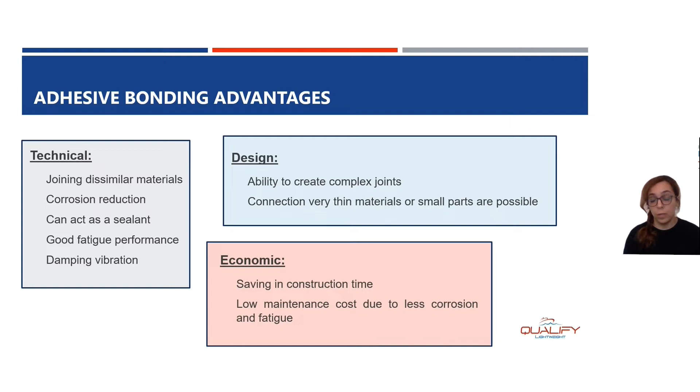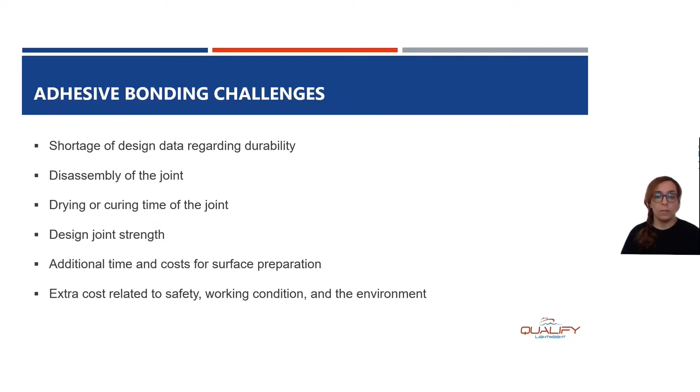There are also some challenges, and that's why Qualify project was started. A shortage of design data regarding durability, disassembly of the joint. These are some of the challenges. We need some curing time, some drying time for the joint. Well, knowing the design joint strength in advance can be sometimes challenging. Some additional time and costs are needed for the surface preparation, perhaps some extra costs related to safety, working condition, and the environment.

Adhesive bonding has been used in many sectors. The focus of our market study was for the maritime sector, but in fact it was used in many sectors. For example, the air sector. This was one of the pioneer sectors for the application of adhesive bonding, although they have very strict regulation. It was also used in the rail sector, civil engineering, construction, automotive, and so forth.

What you see here is an example for a bridge which was built in Utrecht. It was a long bridge, 140 meters long. It was the first bridge with combination of composite and steel. So the deck was made in composite and the frame is a steel frame. Adhesive bonding was used for the joint of the composite and steel, but because it was the first experience, they also wanted to make sure that the design would perform well regarding the lifetime, so they added some pinhole connections. The technique of the design was from Infracore company.

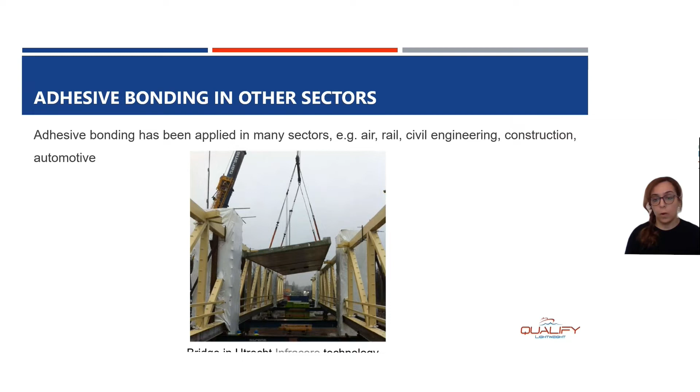You see two other examples of adhesive bonding in other sectors. On the left side, you see a design from Tankwell company. It was a hybrid composite tank solution, in fact. So the tank is in composite with a steel frame, and the joint was done with adhesive bonding. It proved to have advantages. It is the lightest design in the world. And the advantage was that with the application of adhesive bonding, the forces are more uniformly distributed. This means that we avoid local high peak stresses.

On the right side, you see an idea. It was studied for the structure of the bus. So normally the design is in fact in steel with welding, but they thought of adding composite and adhesive joints between the two materials. This was because, in fact, with welding, you have a high risk of fatigue and crack in the design. So with composite and the adhesive bonding, it was a very flexible joint, meaning less fatigue, less damage to the design. And it was also a lighter design compared with the classical designs, which means that also less fuel would be needed, which would reduce the cost.

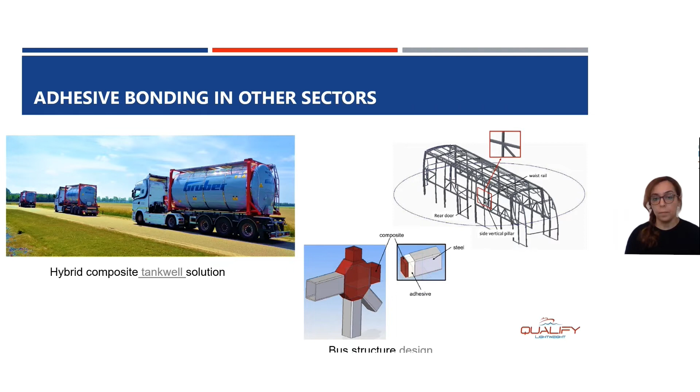In the framework of the Qualify project, we developed a survey to map the current position and the market potential for the application of adhesive bonding. Although the focus of our report was the maritime sector, we addressed it to all sectors. We had 73 participants, mostly from the Netherlands, Belgium, France, and Germany.

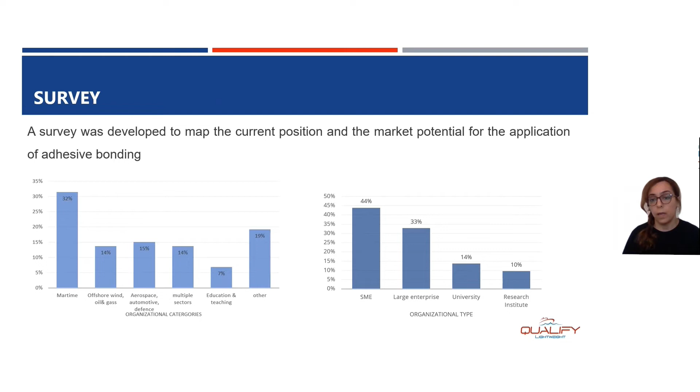On the left side, you see the organizational categories. We had something like 45-46% from marine, offshore, oil and gas, which is the focus group for our market study, so something less than 50%. And on the right side, you see the organizational type. We had 44% of the participants from SMEs and 33% from large enterprises. So good feedback from the industrial sector.

One of the questions we asked the participants was the criteria for selecting a joining method. It was shown that the lead time of assembly is the most critical factor for the selection of the joint; 53% voted for this. With far fewer votes, the next were the cost of the material and reliability.

And 47% said that they already apply adhesive bonding for high-risk structural joints with or without mechanical fastening. I mean purely adhesive joints or, for example, similar to what I showed for the bridge in Utrecht, with added mechanical fastening. In this case, it was pinholes. These are the responses from only the maritime sector.

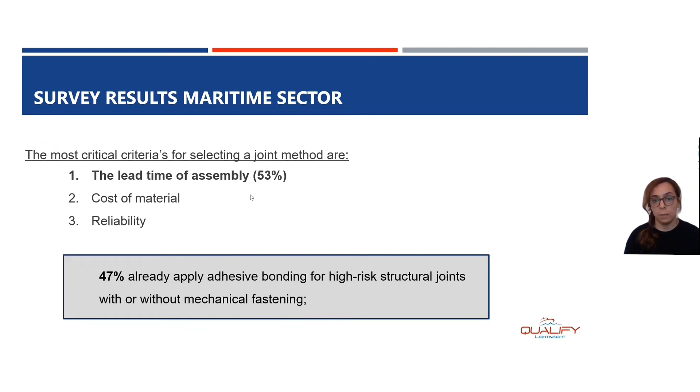We also asked them about the advantages of adhesive bonding. They said that the ability to join dissimilar materials, design flexibility, and faster production or installation time are the biggest advantages. We asked them about the roadblocks for the application of adhesive bonding. Unclear regulation and certification requirements, required testing campaigns, and risk of failure due to aging and lack of long-term performance data were reported as the biggest roadblocks.

The Qualify project had three main objectives: durability of adhesive bonding, regulatory requirements, and inspection and maintenance. We asked the participants to address the biggest issue for each of these objectives. For durability of adhesive bonding, the biggest issue is lack of data. For regulatory requirements, the biggest issues are structural requirements and fire safety, which was not within the focus of Qualify. For inspection and maintenance, the biggest issue is lack of a reliable inspection protocol.

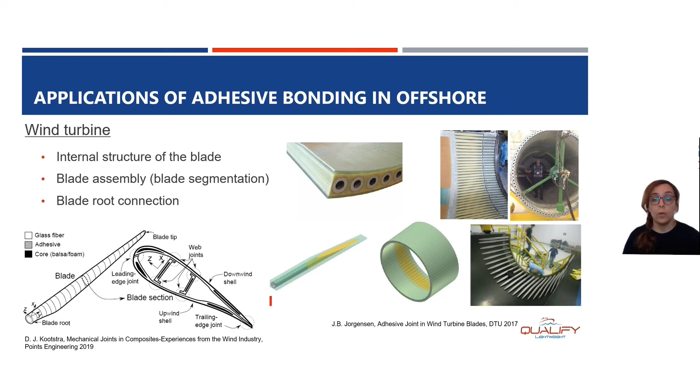The next application of adhesive bonding is for the repair, or in fact for attachment of a reinforcing plate without doing any high temperature work like welding, for example. That's why they call it a cold repair. This is in fact a very suitable method for marine and offshore application.

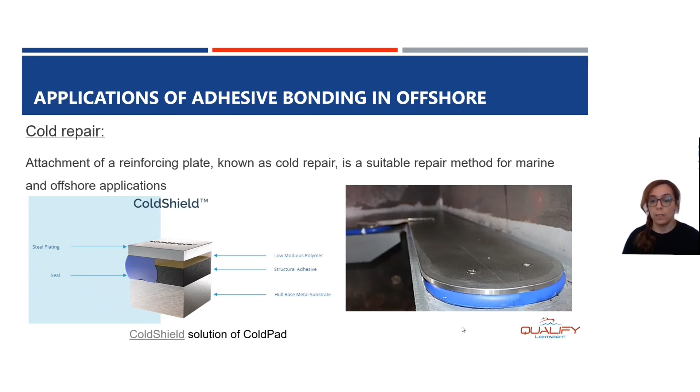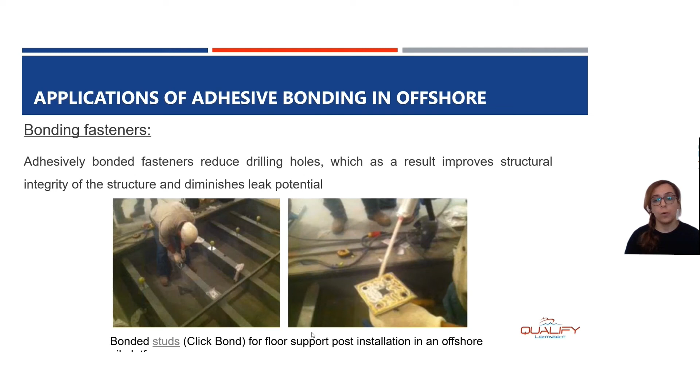The next application of adhesive bonding is in fact for bonding fasteners. So this is an idea to reduce drilling holes. For some joints where you don't want to drill several holes, you can use adhesively bonded fasteners. There are many solutions available in the market. What you see here is an example of the Click Bond company. They call it studs. It was used in an offshore oil platform.

The last application that I want to present is in fact a potential future application. We know that offshore oil and gas platforms in general use some composite grating. And these gratings are connected to the steel frame, the metallic frame. Currently, the joint is with clips and clamps or mechanical joints, but a potential application would be to use adhesive bonding. So this is one of the applications for the future.

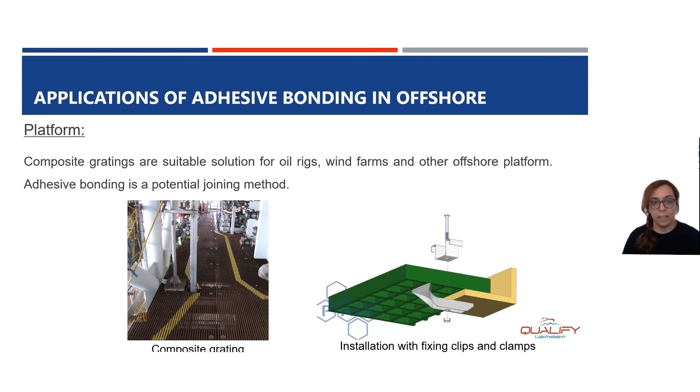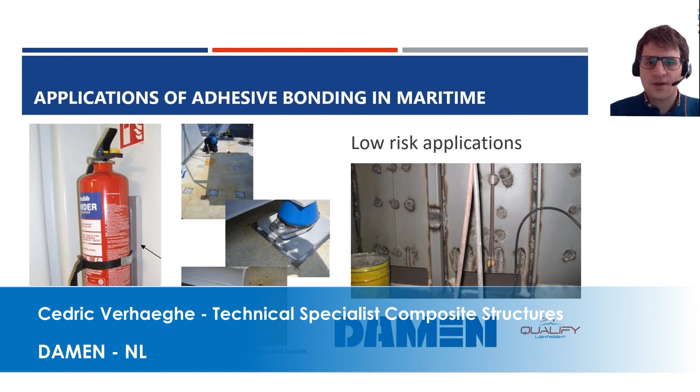I'm now going to give 3 examples of bonding in the maritime industry we at DAMEN are currently applying or investigating. The first application is something we've been doing for some time now at DAMEN, which is the bonding of small equipment inside and outside of the vessel. For these cases, bonding proved to be a time and effort-saving joining method, since there is no damage to the structure or materials on the other side. These are generally applications with high safety margin and low consequences, for which we did some small-scale tests at the start, standardized the process and design, and can now be applied after small hand calculations.

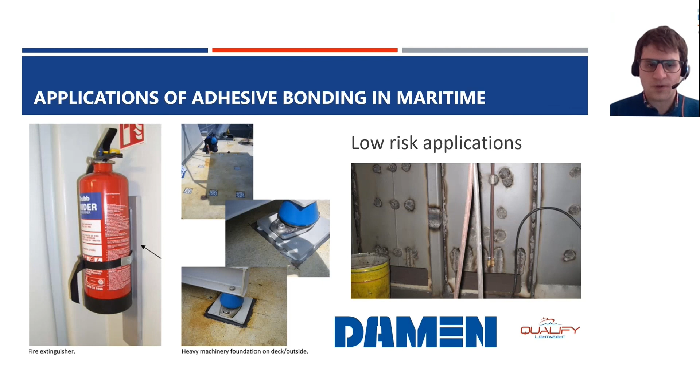The second case I'm presenting is something Damen Gorinchem has been further developing based on the experience with small case applications. This is the bonding of a window near the intact stability waterline. This again avoids hot work, resulting in lower stress concentrations and a cleaner solution. But since this is critical to the intact stability, this was closely monitored by Bureau Veritas. Together with the supplier of the adhesive, Sika, DAMEN performed a set of dedicated tests to demonstrate the performance both structurally and with regards to watertightness.

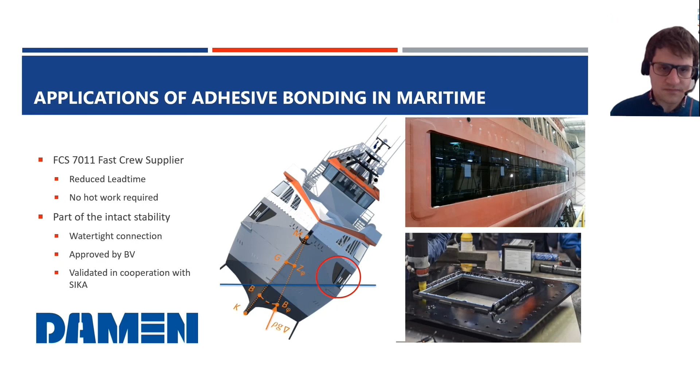And the final case is the Qualify case. This is something that DAMEN Naval is very interested in. This is when we were considering a composite superstructure to be bonded onto a steel hull. Since composites cannot be welded, we can either bond or bolt the composite structure to the steel hull. And we have chosen bonding, since this does not require any structural modifications to the composite itself, requires less labor, and reduces the maintenance over its lifetime.

The approval of a joint in a primary structure exposed to seawater and significant loads does require a thorough understanding of the loads, behavior of the material, and manufacturing quality. This is why we joined the Qualify project, to be able to set up such a knowledge base together with the other partners such as Bureau Veritas and Lloyd's. And this case will now be further explained during the rest of the day.